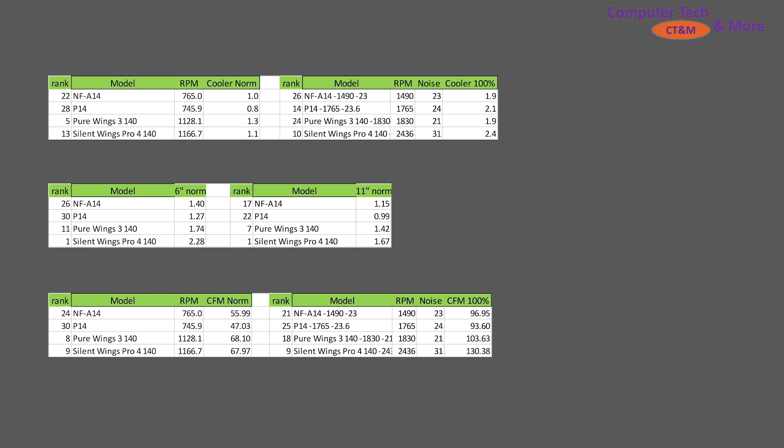Here's a little bit about how it ranked at the time that I tested it. Since then I've tested potentially more fans, and I do have videos that are best-of roundups, so I recommend checking out those videos on my channel, and I'll try to link them somewhere.

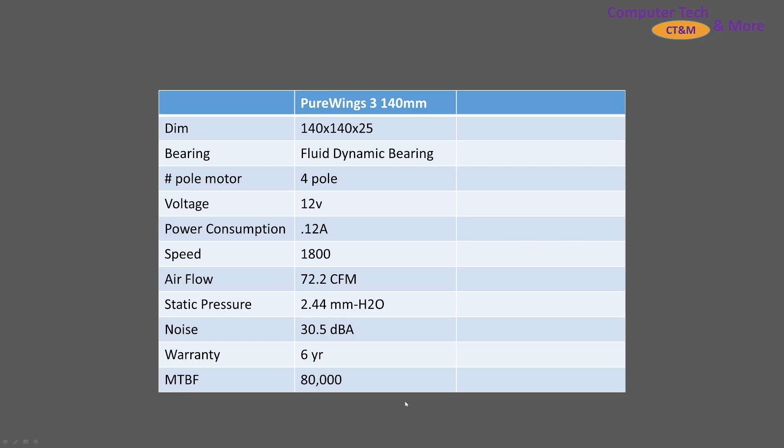The spec information is pretty bog standard for a 140mm class fan: fluid dynamic bearing, 4 poles, and you can see the other specs on here, 6-year warranty.

The first test on here is the case simulation test. It can be looked at scientifically for how good the airflow concentration is, or what size computer case do you plan on buying and sticking this fan into.

The first mark is the 6-inch mark. This is representative of a small form factor case, think an ITX case, so length would be around a 120mm class fan. So it's also representative of a short throw distance.

That would be a fan in the bottom of your case blowing up towards your GPU, or in an inverted case, having fans at the top blowing down into your GPU. Either way, it's that sort of short distance, and this is assuming an air cooler.

Next is the 9-inch mark, approximately 240mm class fans. Think a case that can hold a standard ATX motherboard but not really much extra room beyond that, so the GPU would be the length of that motherboard. Think like a media center type PC, potentially.

Then we've got the 11-inch mark. This is your standard mid-tower case, 360mm class fans, or standard 360 AIO.

And then we have the 14.5-inch mark. This would be your truly large towers, 420mm class fans, a lot like the Fractal Design Torrent.

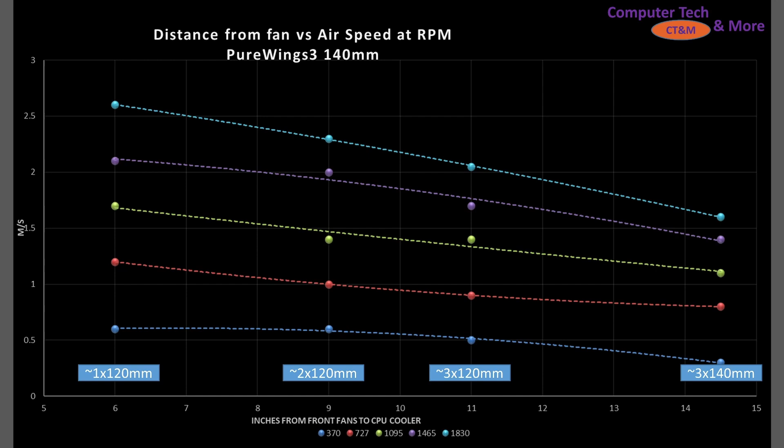Again, this airflow path matters for air-cooled systems. If you're looking at AIOs or a full-on custom water cooling system, you can basically ignore this section and move to the next one.

So we've got my control fan, it is 3 parts A12x25, 1 part A14, listed right here at the top. And we have one other fan on here besides my control fan, the Silent Wings Pro 4, at a similar RPM for its noise normalized value.

Fans that rank better than my control fan we consider good, very good, or best. Fans that rank underneath it would be considered okay to good. The control fan, being a blend of 120 and 140, is like a 130mm class fan, so it's not really best at either one.

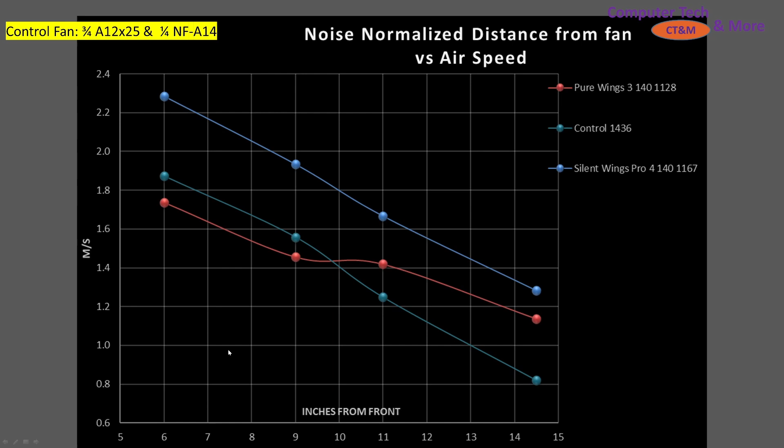120s tend to do better at the 6 and 9-inch marks, 140s tend to do better at the 11 and 14-inch marks. We kind of see that here, where my control fan does slightly better at smaller cases, but as it gets larger, it doesn't quite do as well as the other two fans listed in this video. So the Pure Wings 3 would be recommended for mid-tower and larger cases, but generally not recommended for smaller cases, assuming it could fit inside of them.

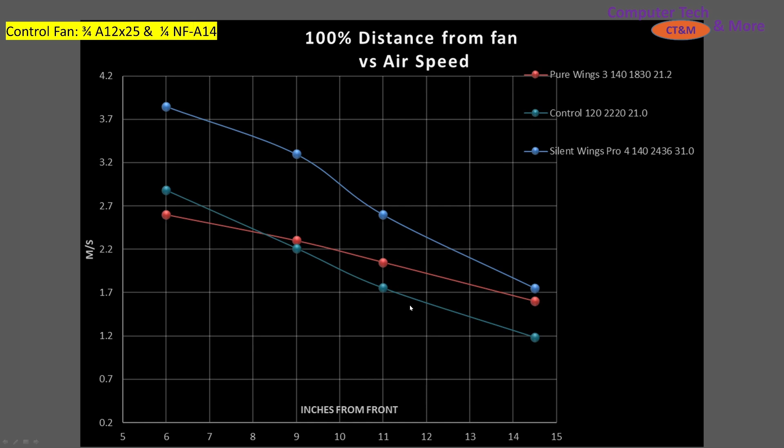At 100% PWM fan signaling, it once again trades blows with my control fan. It wouldn't get a strong recommendation in smaller cases, but as the case gets larger, it gets a stronger recommendation. How does it rank against other fans?

Again, a small, simple cross-selection of fans that I chose to compare against in this video, and it does pretty well. Not particularly standout in smaller cases at this noise normalized mark, but in larger cases it starts to stand out from the pack a little bit better, so it gets a recommendation there.

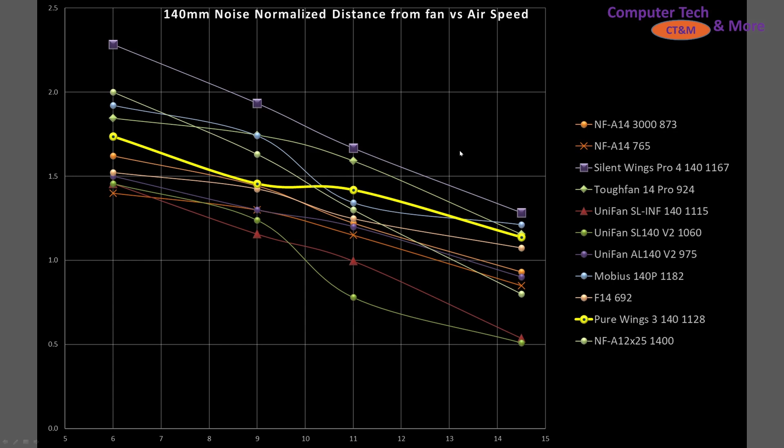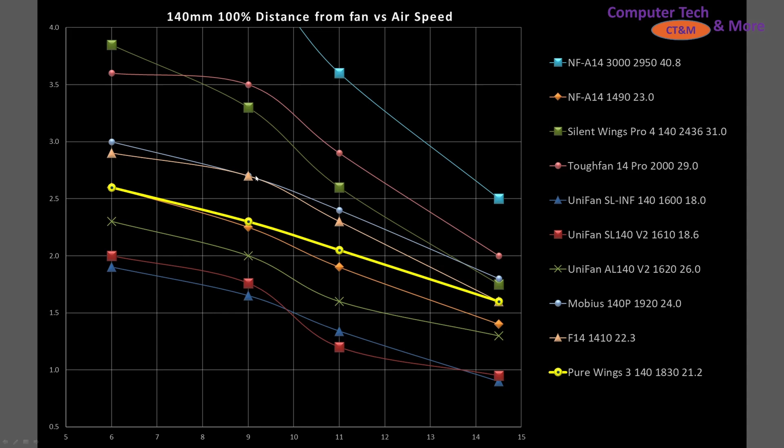At the 100% mark, RPM matters, and it's spinning at 1,800 RPM, almost 2,000. Among fans that spin at a similar RPM, there are ones that do quite a bit better than it, like the F14 as well as the Mobius 140P, but it's doing okay, while the fans that really do well spin at much higher RPMs.

Next, airspeed through my CPU air cooler. I don't have a test system yet, so I can't do thermal results. It is something I'd like to acquire thanks to viewers like you joining me as YouTube members or becoming a Patreon or hitting me up with supers. It really does go a long way.

I recently acquired a radiator to do testing. Unfortunately, once again, I don't have a test system to get those thermal results, so we're just going to do airspeed versus noise and RPM at this time. I do have an approximation on the next chart for what airspeed approximates what wattage on my particular CPU.

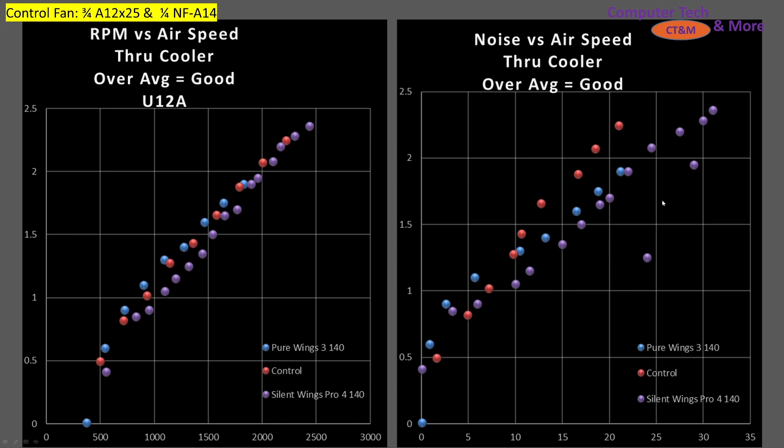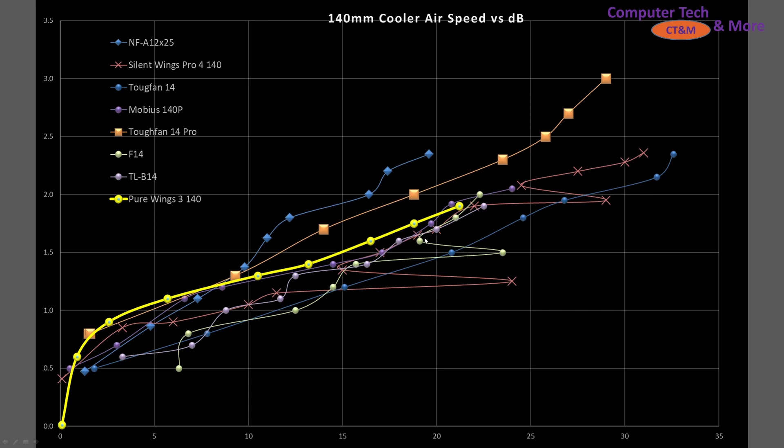How about in that noise versus airspeed result? Well, it does really well at lower RPMs, but as it increases, it doesn't hit quite as hard as other fans. It's just not quite as strong. It basically becomes average, with these other, albeit good, fans, but not great fans. So take that for what you will.

With every beQuiet fan, the dominant feature, in my opinion, is these ridges on the fins of the fan blades. Now these ridges are here mostly for their style purpose, but they do serve a function. They help guide the air around the fans, because as it spins, the air has a tendency to slide off towards the tip, which is why you want close tolerances between the tip of the blade and the housing, so that you don't get any back pressure in a pressure scenario, and it also improves the efficiency at which the fan can force the air down.

And these ridges just help guide the air along each of the wings of the fan.

If we take a close look at the distance between the edge of the blade and the housing, we see that it is fairly close, much better than an average fan. Older average fans were actually probably closer to maybe this ridge, or maybe even kind of in the middle there, while more modern average fans are kind of at this one tip while it extends right to the next little flat area. So that is great to see.

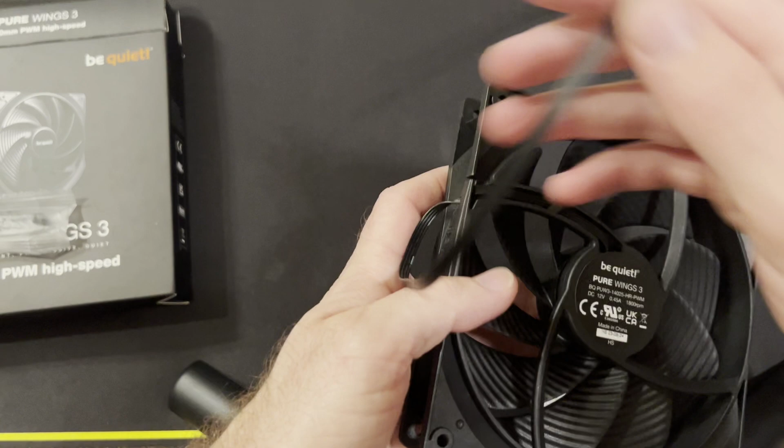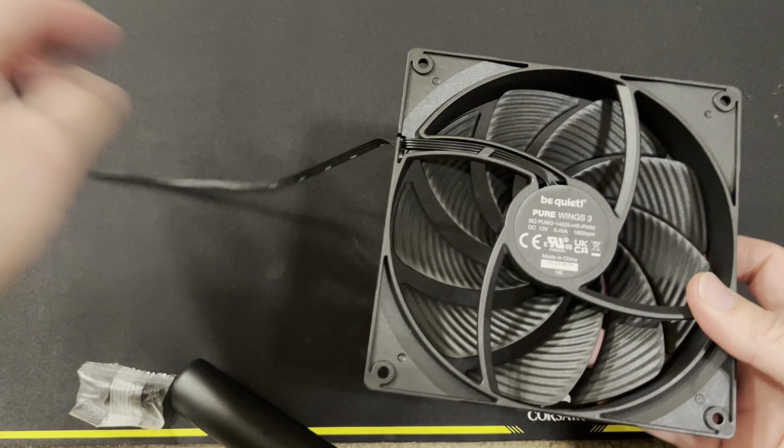The hub in the middle is a little bit on the small side, which is good because you get more fin area or wing area. If we flip around to the back real quick, the struts are fairly thin except for the wire one. I'm going to call it average for nowadays. There are definitely ones that have made it thinner. This one is certainly thick and very flat, so that is going to cause a little bit of extra resistance against air flowing past it, but not overall the end of the world. The other ones are nicely angled to cause very little disruption as the air flows past it.

So the struts are one of the areas where you will get noise. As the fan spins, each time a blade passes one of these struts is basically a section where noise can occur. So having the space where the blade interacts with each of the struts as small as possible helps reduce that interaction. Other than that, the inner part of the housing is very basic. It is just a smooth bore, no inlet design, no outlet design, just perfectly flat.

The rest of the frame is also more or less basic. It's just got this little bit of indent to give it a little bit of styling so it doesn't look completely flat. There's no rubber pads, although it does look like there's space that they could be sold aftermarket and placed squarely in there to get some vibration dampening going on.

But other than that, if you wanted to use this in a radiator or heatsink or anything like that, the frame is a nice square design, so fan next to fan next to fan, they should seal up fairly nicely with one another, so you'll get a good pressure seal in a pressure type application. Not that this fan is necessarily designed for it, but if you're on a budget or a different fan died and you have these in your case, and you just need something as a quick swap, it would do just fine.

And quick version, the blades themselves are more or less a hybrid style, as most fan blades are. There isn't a true overlap between each of the blades. Might be end to end, but it's very close. And the distance between the blades is a little bit on the tight side. So again, kind of halfway in between a pressure fan and an airflow fan. But most fans these days are this sort of style. All right, let's move on.

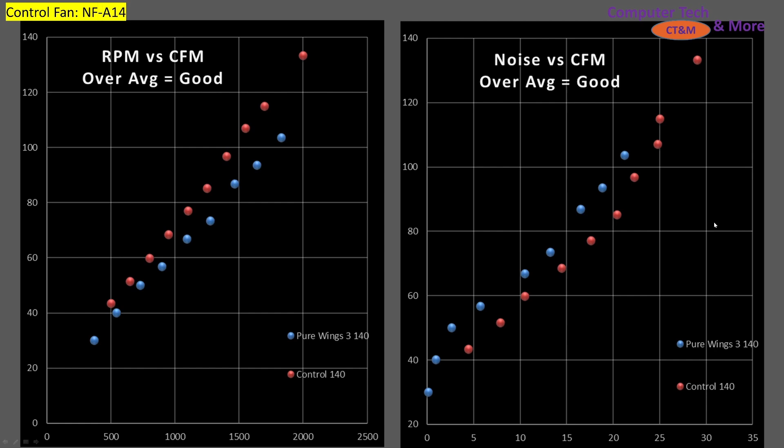So once again, we got the blade efficiency over here, and it's underperforming compared to my control fan, but not by a lot. And we got noise versus CFM on the right side, and it's doing slightly better than my control fan on this side. So take that for what you will.

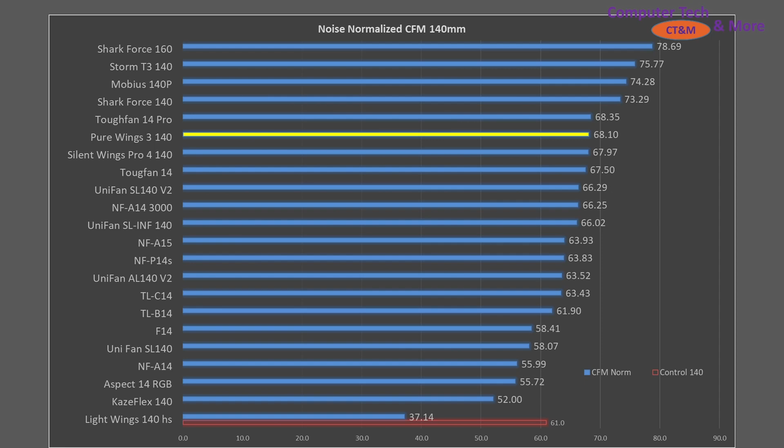It's doing pretty well. And in terms of noise normalized results, CFM, it's ranked towards the top of the graph, so it's doing really quite well. And these noise normalized results ignore the RPM. It is just normalizing it to a noise level that I found basically inaudible in my home environment.

In terms of its CFM versus decibel rating compared to a small subsample selection of other fans, well, it's sitting right at the top for the most part. It's kind of middle top for these other fans that I chose. And all these would be ranked fairly well overall. So it's doing really well.

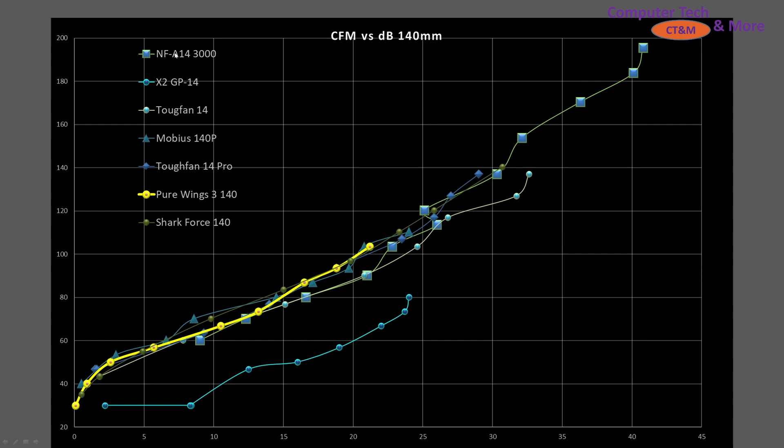All right, now we're taking a look at the value proposition. This is a $12 fan when I purchased it and checked on Amazon; prices do change. So that means the value proposition of fans does vary based on sales and whatnot. But based on standard retail pricing I could find, this is where it lies.

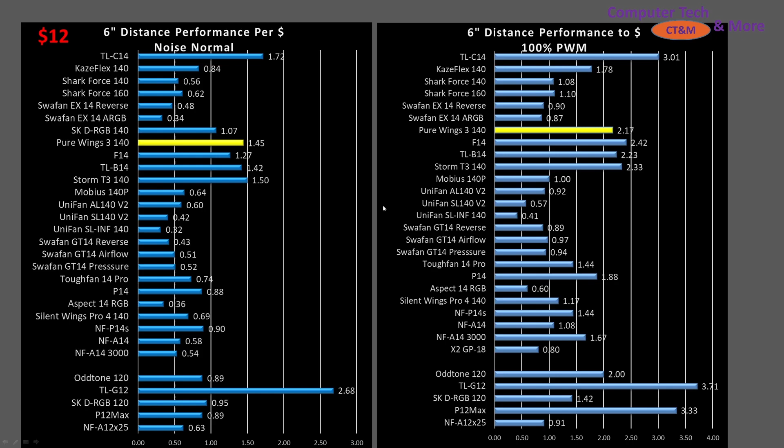And overall, it is a great value at the 6-inch mark, noise normalized, and at 100% PWM fan signaling. It isn't the best, it isn't at the tippy top, but it's doing really well in terms of that value. So if you're looking for a budget pick, it's looking like a good option.